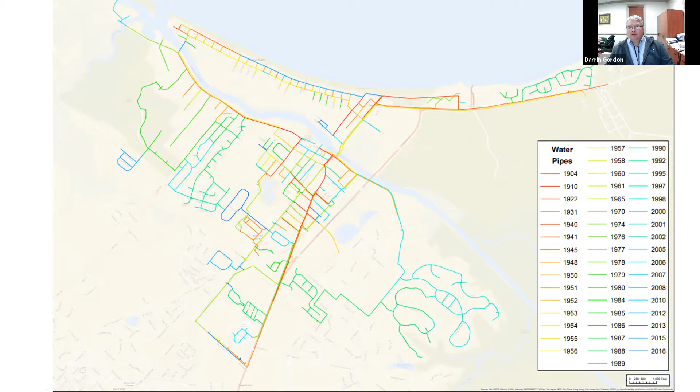Thank you, Charlie. The other thing that we need to talk about and make sure that we understand is this is a look at the dirty water calls we've been receiving. The yellow dots are in 2020, light green 2019, red 2018, 2017, and the blue ones we're just not perfectly certain on those dates. But in those 4 years, we've had about 23 dirty water calls.

Now, one of the things I think Robert brought up, he said there's some people out there saying that they've complained about dirty water so often that they've quit calling. That's possible. But if we look at that, I don't know that we're getting a huge outcry for dirty water. Most of those end up in April and October, which happen to be the time when we're flushing hydrants. But these are calls that we've taken, we've been keeping them mapped, keeping them recorded. They're on our NISC customer portal. We're keeping track of them.

I don't see Kathy Tatman's on there. Michigan, I think it's over here, isn't it? What's the other side of it? Is it right there? Right there, not on the beach, yeah. Okay. We'll make sure hers gets in there. She's on Michigan, isn't she? Michigan on Bay, but not on the beach. So does her tap come off of Michigan or does it come off of Bay?

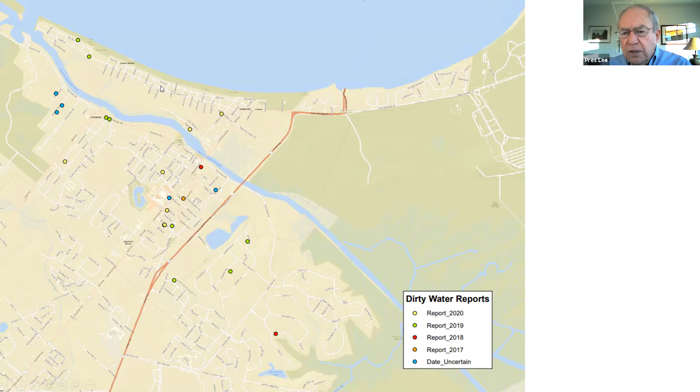Because Bay was replaced. She lives on Bay now. But wasn't that whole line replaced when Bay Avenue was done? Yeah. So that's weird. It might have come up Michigan. I don't know what the flow was at the time or where it was coming from, but it could have come up Michigan, I guess, 'cause she's right around the corner. The Bay Avenue line is all new. Right, you're right.

That red dot from 2018 is likely me, by the way. And that issue was resolved when they put that unit across the street at the pumping station. Haven't had a single problem since. Very good. So here's one that's all the way out in Wolf Run, and those pipes are nothing but new. And we had one that was in the middle of Schofield.

I don't know that I'm gonna go do a whole lot to try and prove, change or worry about the iron that's in there. But we're tracking the best we can calls for dirty water. But I don't think there's an overwhelming hit. You look over here on Rodney, and we know that Rodney's got issues. And frankly, it was Janice Pinto. We went in and we found out that her line was the problem. Let me go forward a little bit.

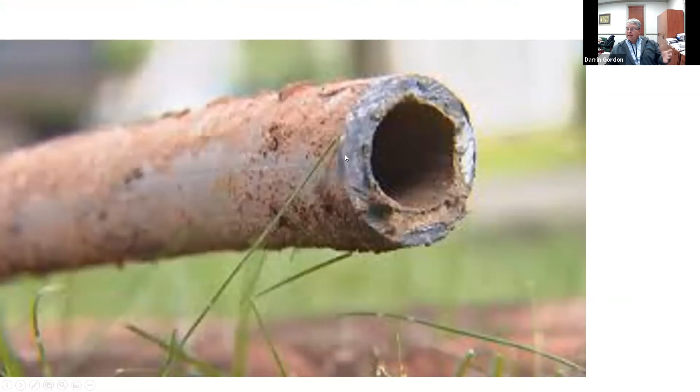We really jumped on this because we wanted to get rid of lead. We'd gotten a testing error a couple of years ago on the lead, and that became a real impetus for us to try and get the lead out of the system. Our water mains are not lead. They are either cast iron, ductile iron, or plastic PVC.

But what happens is this gooseneck, our connection into the water main, is lead to the curb stop, and our meters, the majority, not all of them, are right here at the property line. And then these lead lines and lead appliances that go into the homes, that's where that lead really comes from.

We were trying to get some money from the state to help us get rid of that lead, and to help us also in replacing some mains. And at that point in time, the federal government said we're not doing that anymore. They wanted to concentrate on the private side of the line, and we don't want to get into touching private property.

If there's somebody that has a home that's older than 1986, when that act came into being, that's when they need to look at their own plumbing, etc. Down on Pilottown Road, all of the lines that were connected to the old 6-inch and the old 4-inch cast iron, we're going to be moving those to the new PVC, and they should be golden.

Go ahead, Josh. Excuse me, Darrin, you said about the lead coming from the tap into the main. Do we know of any specific remaining houses? We know that there's more out there, but do we actually know of any that we haven't corrected? We don't. We've got a guess possibly, but no, we do not know. If we do, our policy is that if we find one, we're going to replace it. That's what I thought. Okay, I just want to make sure I understood that. Absolutely. No matter what, if it's there, we're gonna replace it. If we learn about it, it will be fixed.

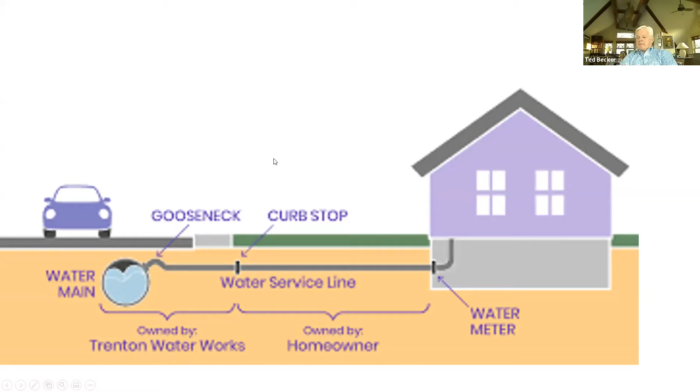And so we do that now. I thought there'd been discussion that anytime there was serious renovation of a property, you were going to require a replacement of anything that was not PVC from the tap into the home. Is that right? Correct. Absolutely. So if we find out there's a lead, it's got to be replaced to the tap so that all lead is taken out of service. Some of the renovation that's been done, they just cut it off inside the foundation and replaced from there on, but it really needs to be replaced all the way out.

Does that apply to galvanized as well as lead, Darrin? I don't know that we have any galvanized services. Okay, I thought that's what Leanne's problem was, at her daughter's house. That's from the meter inside the house. Yes, that was the problem with Janice Pinto. We went up to the meter. What we had was clean. What she had was galvanized from her meter into her home. And that's her responsibility.

But I thought the mayor just asked you. That's exactly what I was asking: whether, if there's a major renovation and they have a service going into their house, we require them to replace it. Part of that is that we don't inspect that. If it comes to our knowledge, we let them know it's there, and it's up to them to replace it. From the meter to the main, that's ours. If we find it on our side, we replace ours. We don't replace theirs. That's private property. We just notify them.

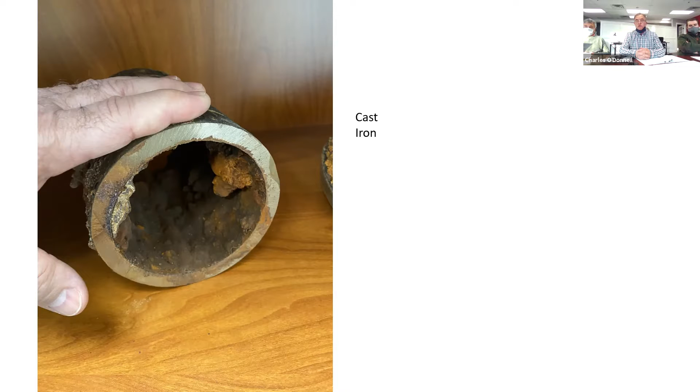I will say this: lead water services, when you pull them out of the ground, they're as clean as a whistle. There's nothing on the inside of them. There's plenty of flow capacity. But of course, you have the inherent health issues related to those. But galvanized pipe is just the opposite, awful. It's almost completely filled up on the interior diameter with a pinhole going through, which is very bad for people's pressures inside their homes. So I'll just throw that out there too. Point of clarification: did I hear somebody say that ductile iron is not permitted for water mains, or only on service lines?

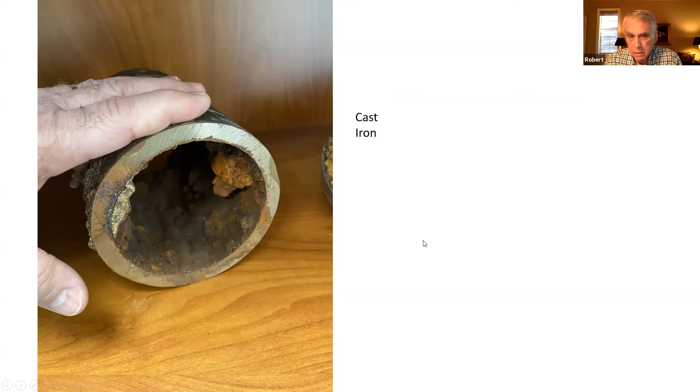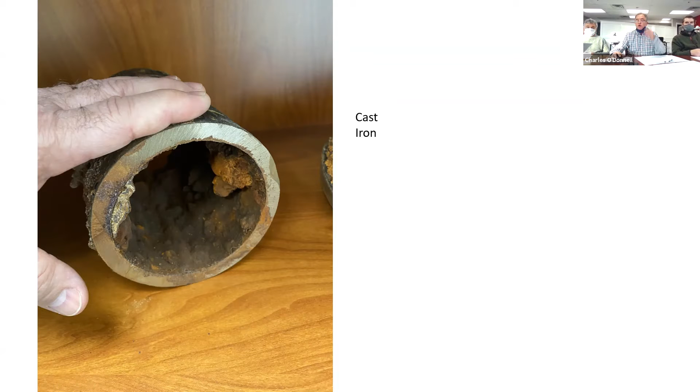Ductile iron is permitted. It is not often used to serve a residential house, if at all. Ductile iron. Right, I agree. Thanks for clarifying that. Yep. And main, I'll show you a picture here. So the difference is we're talking cast iron. This is a piece of 4-inch cast iron, but if you look at it, there's about a 1/2 inch of good solid iron that's in that pipe.

So the other maps that we have, well, what we did is we have looked back for about the last 5 years for the number of main breaks that we've had. And in those 5 years, we've had about 5. And I'll tell you that that's a fantastic number. We had a big one on Market where a 6-inch cast iron pipe broke. We've had 2 of them that were ductile iron, both of them kind of on Savannah and 3rd. Both of those were right next to some storm drains, and the temperature was in the 0 degrees a couple of years back at Christmas time, where the heave, I believe the freezing ground is what broke it.

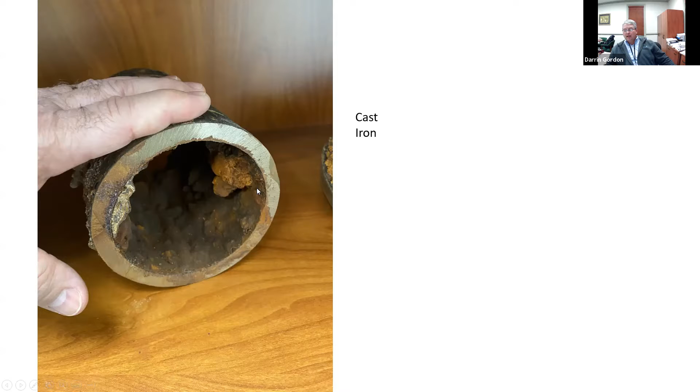And then we've had about 2 more. All the others, we've had corp stops go, etc. But these mains are incredibly strong. There's still a lot of iron there. And so we see the tuberculation and those issues, but those pipes are still pretty substantial. That's a cast iron. These are the oldest pipes that we have. And all it is is iron on water.

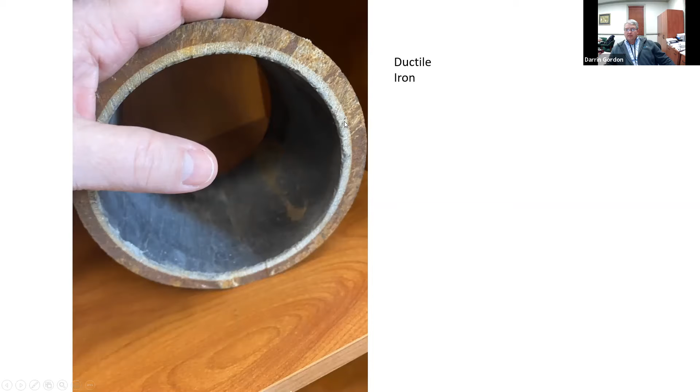Ductile iron, this is a 6-inch ductile iron. You can see that there's a concrete cement lining in the middle. And this one, where it was pulled from, this is a beautiful pipe. Again, you've got a good 1/2 inch of steel on the outside. You've got the cement lining. That ductile iron is an exceptional, fantastic piece of pipe. This one has many, many more years of life in it.

This ductile iron pipe is still highly regarded. And you take and look at the cost of ductile iron versus PVC, and they have exceptional life. They have exceptional strength. They provide quality water. These are wonderful pipe. Hey, Darrin, can I just interject? So when it comes to the pipes that we're looking to take out, I assume the ductile pipes are not pipes we're looking to take out. Is that correct? Well, that's a great question.

And that's what I'm gonna propose to you, is that instead of simply looking at the map where we know what the ages of these pipe are, we need to take a step back and look at what the quality of the pipes are. And instead of just wholesale saying we're going to get rid of all the iron, let's make sure we're getting rid of those that need to be got rid of, but we're working with those that don't. And if there's some that might use a relining or a regrouting or something to that effect, maybe that's a better way to do it.

And so what I'm going to propose is that we take maybe a 4 to 5 month break. Let's go through the system and start taking some coupons, pothole shots of these pipes where we have concerns, and let's make sure that we're being as efficient as we can. Let's not throw out the baby with the bathwater, I guess. So Darrin, that was my question.

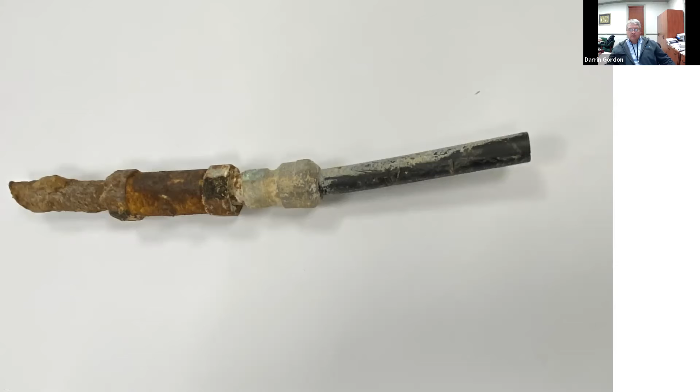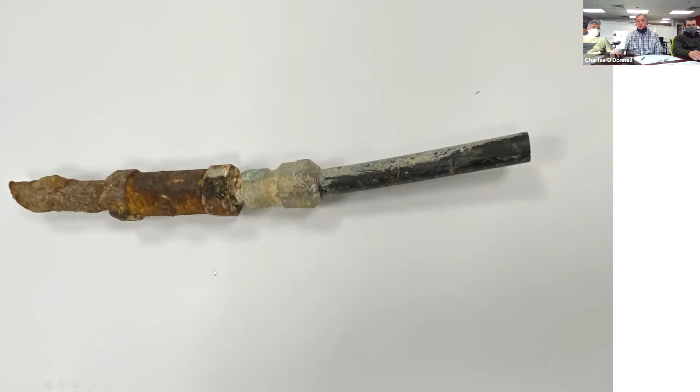I think Mr. Kennedy's summary is pretty much what we're looking at doing. We would do the test pitting, pull sections of the pipe, of course replace the pipe as we pull those sections, to determine the condition of our existing pipes and to see where we want to replace them or not. Hey, Charlie? The numbers that we've got in the plan as we have it in front of us today, does that assume a total replacement? Or are we leveraging technology and different things in reducing those costs?

We're gonna look at, so I think there's absolutely, yes. We want to look at, for instance, there's a place over on Bay where we have a water main that goes almost parallel with the front door; it's way up inside the yards. And the cost of us having to go in and redo landscaping, etc., I think would not be a good use. I think we've got only a few homes on there.

And then if we did that in the wintertime, where a few people were home, one of the expenses of doing a lining of a water main is that you still have to keep those people in water service. They can put a temporary service in fairly inexpensively, reline the pipe, get out of there, cheaper than it would be to replace and renew. But we've got to take a look at almost every project with that lens to say, if we've got good pipe, let's not throw out the good.

So the numbers that are in the plan, are they the worst case scenario and these things will advantage us and reduce the cost? Or is it assuming a certain cost advantage with this different technology? There's no technology costs in the proposed 10-year budget that I have. So these could be cheaper than what we're seeing. Yes. Okay, got it.

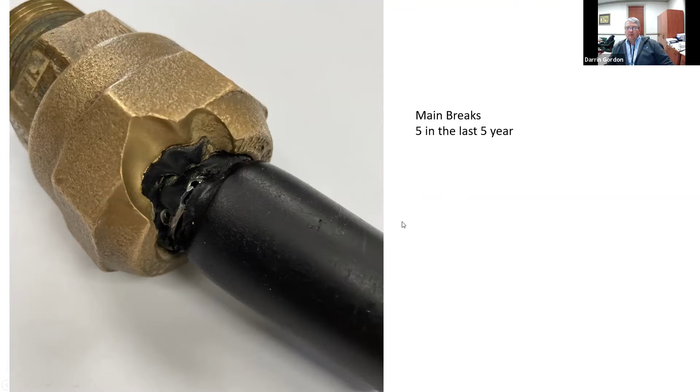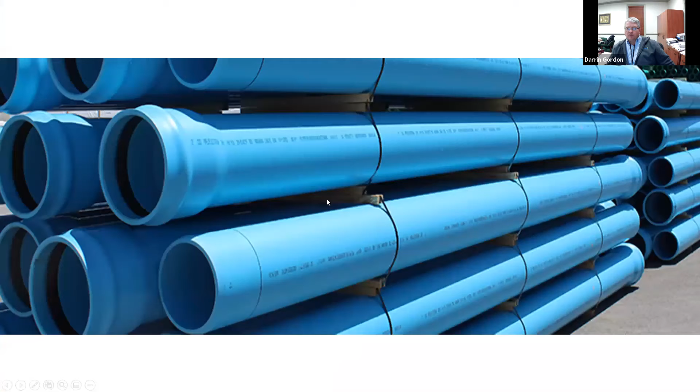Let me see if I can get to the next one. Come on, here we go. HDPE pipe - this is what we use mainly for our services going from the mains. It's a wonderful pipe. We don't have much of it in our system. We do have C900 PVC. This is water mains, this is what we're putting in the ground over on Pilottown Road. It's a wonderful pipe, pretty much industry standard.

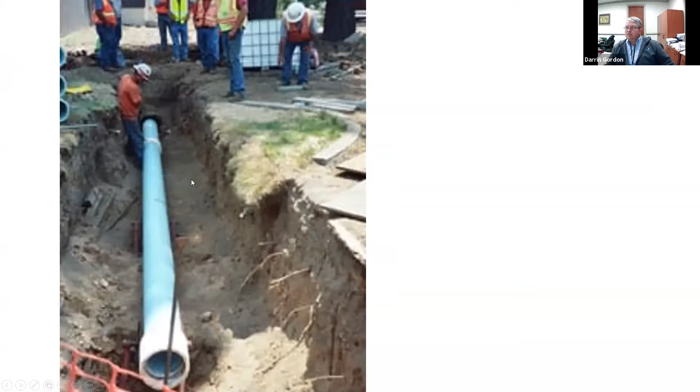And one of the things they've done lately is fusible PVC. This is what we went under the canal from the dairy across to C.H. Mason's Way, under the canal. We're in good shape there.

What's the life expectancy of that, Darrin? Say that again, Earl, please. What's the life expectancy of that? I think it's about 100 years, 75 to 100. Charlie, do you have an official number on that? Well, it's new technology, but yeah, the PVC pipe part of it's probably got 75 to 100, going into it at least.

It's just fused together, so it's a little bit different than just regular PVC pipe, but I would still say 75 years minimum. Charlie, is this more flexible than standard PVC? I don't think so, but one thing it's better for, Press, is that for directional drilling purposes, oftentimes

contractors will install the HDPE, which ends up being a problem when we insert our corp stops for services. They tend to leak on the HDPE because they've got ridges on the outside of the pipe. And this fusible PVC is much better for that purpose.

Well, I'm going to show my age now. When PVC first became readily available, it was all fused, solvent welded pipe. And I remember one of the first applications we used it for was for a manufacturing facility that had some very hot effluent, and the pipe would expand and crack because it didn't have the bell and spigot that could give a little bit.

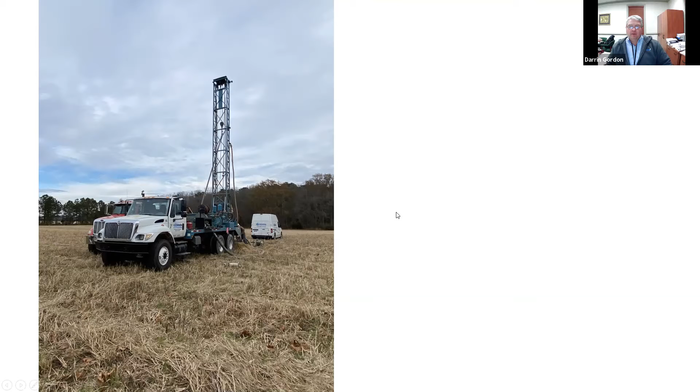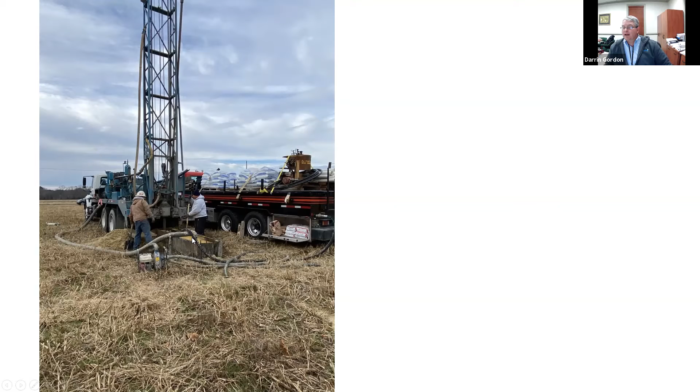Thank you. So this is the well drilling, A.C. Schultes out there, this is on Lynn Road. I've gotten some information back on number one, the supply. We're looking at a 500 to 600 gallon a minute well. They've sent in for information for the testing for the water quality, and we'll get more information and direction there. But currently what they're saying is they feel pretty good about it at that 500 to 600 gallon a minute. So I have some monies in the budget to help move that forward.

So let's look at that real quick. Let me see if I can quickly get back to here. That was on the Tower Hill property. Yes.

So here's the facility, this is for the well development, and that's all of that creation of the whole new. And then afterwards, we'll build the facility around it, starting probably in April is what I anticipate doing. So that will be the engineering. I would possibly, this number may move up into '21, '22.

Yes, Robert? What special circumstances are we facing with the enclosure around the well? Does it have to conform to a certain architectural style, or is it industrial? What's the thought on that? On the contract, I believe all it says is it's going to conform and not be an eyesore. Charlie and Vince, do you have any comments on that?

Say that again, Mr. Kennedy. Sorry, you're very low. Let me.

This is going to be inside the Tower Hill development. Are we going to have to build the enclosure to resemble a residential structure? I've seen Tidewater do something like that in some of their production areas. Our very preliminary look at this is to create a masonry building with decorative block and a nice roof on it that will blend into the development. I don't know that it would necessarily look like a house, but it would have some architectural component to it.

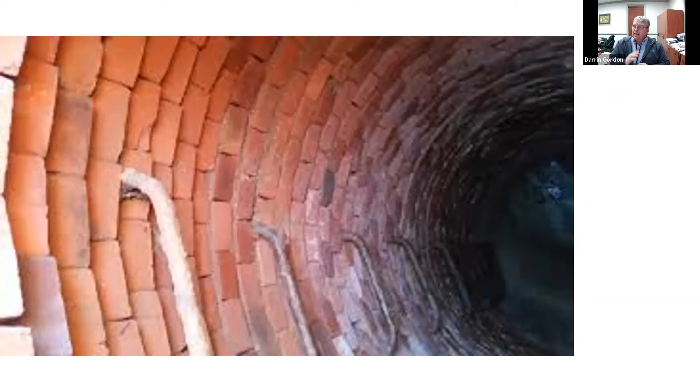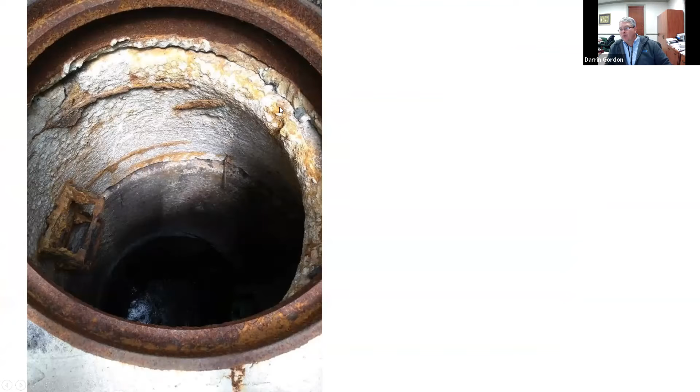One of the technologies we found—Charlie and Vince did a great job, and Josh did a great job finding—is for manholes that look pretty rough, the ones with brick, we've got some old ones. This is the corrosion from hydrogen sulfide that's in the sewers. This is not one of our manholes, this is an example of the degradation though. We have some that are rough, but not quite this rough.

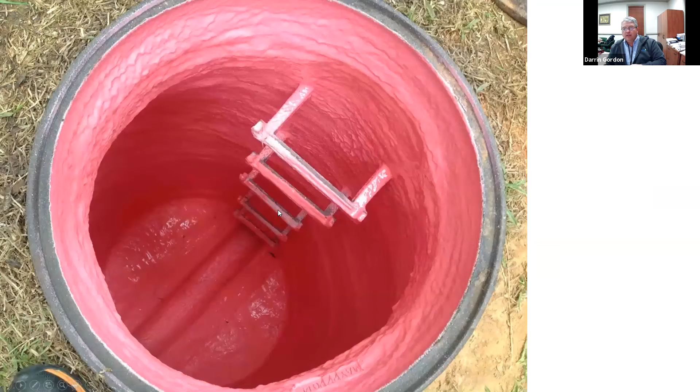What they do is a two-part operation. They go in and spray a foam structure onto the manhole, about a quarter inch layer of plastic. Then they put on about an inch layer of foam, trowel it, and then put on another layer of the plastic. What's cool is down here, there's an imprint of the date when that job was done. It's an exceptional process. This would be the last step, so if you look at the dates...

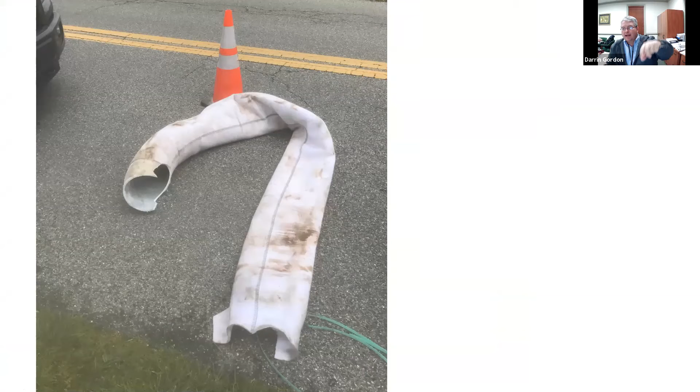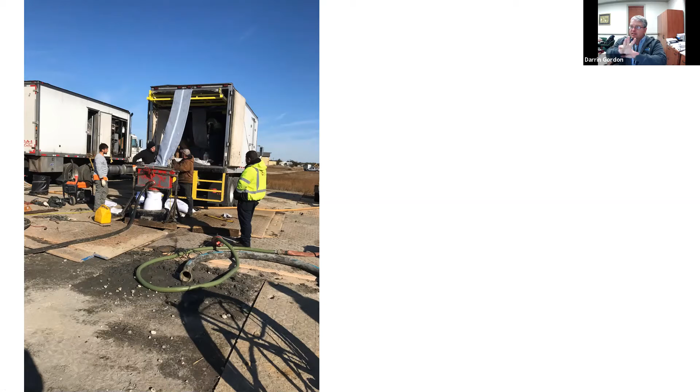This is the liner that we do with the sock, a fiberglass liner that goes through, and then they impregnate it and cook it. This is the liner itself, actually the same liner type. This is going into the marsh—this is the outfall from our wastewater treatment plant that we did a year and a half ago. This truck has ice in it. They take and pull the liner using air pressure, and it drives into the pipe, kind of like a sock being turned inside out inside the pipe. And then they cook that bugger.

So here in the sewer, we've got manhole lining, and that's what these numbers are. This number comes at the end of the waterworks and the liner works for the sewer, so this piece will be the very, very, very last item to be done. All of those manholes will be lined and secured that way.

Nutrient trade, we still have that we do on an annual basis. Just a question, Darrin, it's just my newness here, but when I think about water, obviously clean water matters. When I think about the sewer system, it matters obviously, but the manhole covers, what does that do for us that would cause us to do it this year and next versus pushing it out further?

One of the problems, so we are probably, in my opinion, a little bit behind when we have I&I. I don't know that we have a lot of it coming through the manholes, but the brick manholes are definitely something that we've got to address. This is the best way to do it. We've had a few of them that we've replaced entirely. Front Street, we did a couple. We've done them as we've needed them.

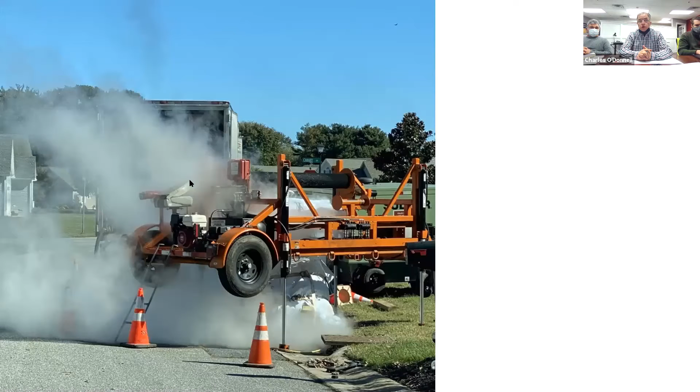Earl, this is Charlie. I just want to let you know that that plant with its membrane filtration and its membrane usage at the sludge handling facility is really technologically advanced, especially for a municipal facility. And the wastewater effluent coming out of this plant, the suspended solids and the BOD loading are negligible, which is far better than most traditional plants. And this plant already reduces the nitrogen and phosphorus that gets out into the canal tremendously, and it even has a greater capacity to do so by its operation.

I do think the redundancy, alarming, SCADA, can have some improvements as time goes on with new technologies for sure. And look, I do agree with everything you've said. The only thing that I will continue to try to figure out is other firms have monitoring systems where they can be home and look at their computer and all the data comes up. Other ones have one where they can actually turn things on and off. And I get what Darren's saying and others around security issues. I just think we need to continue to look at anything we can do to help us make sure.

Okay. And again, I think technically the plant is very well run and put together, but it's that monitoring system that I keep thinking about. Okay. Thank you. We'll stay on top of that. And seldom have we prevented the wastewater operators from putting in alarms or things that they feel is better. So thank you very much.

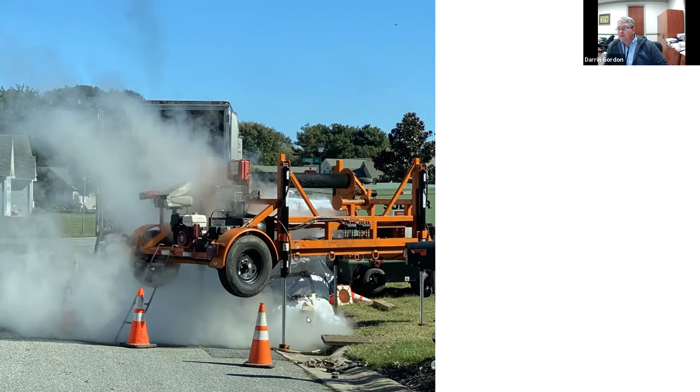Stormwater. Couple items on there. Probably the biggest one is the MS4. This is a picture of us putting a lining in down in Pilot Town Village. This is the same technology, same group, Specialty Pipe Services, SPS. This is a 24-inch sleeve that they put in, and we've done it in a couple places. Again, we've got pipe that goes in between homes under people's property.

And when it comes to that, the cost of doing all of the landscaping and replacement of trees, etc., with taking and replacing a 24-inch diameter pipe is significant enough that we found it much better and wiser to put the lining where it's needed. And so we've been trying to be judicious with that. It's quite a technology. They do a great job, and we've been real happy with them.

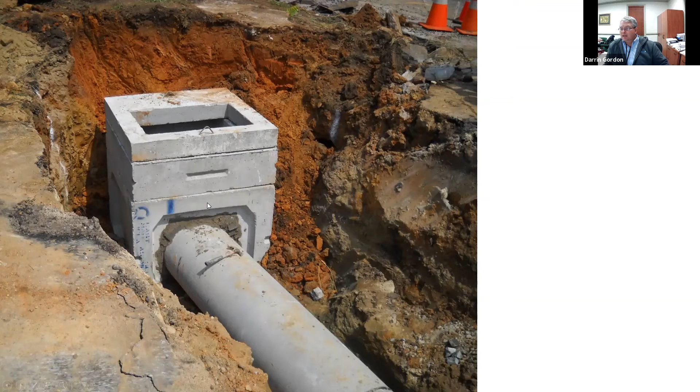MS4, this is a new structure for MS4. There's all kinds of technologies that we might end up needing to establish. Tom Panetta, looking at the budget that I've proposed, I've got it out, I believe, 4 years, where we're starting with a couple $100,000, and the next year 300,000, and then it kind of drops back down. We don't know what we're going to be required to do with MS4. The whole idea is that it's cleaning up a big, huge problem, especially with fertilizers being put into the water system, soils. There's discussion. Sometimes you have to test at the outfalls into the canals.

We have approximately 22 outfalls into the canal. And if we have to do something with each one of those outfalls, that's going to be a pricey start. There's just a lot more questions of whether we're a phase 1 or a phase 2. We've got sea level rise. We've got all kinds of things coming at us. I just think we've got to have an idea that in the future, there could be a big dollar sign. And so that's why I've put that amount into the budget. I've left it out 4 years.

We'll just recognize that if they come in tomorrow and tell us we're in, that money could be moved up to this year or the next. It's an unknown, but we've got to recognize it's there. And that gets us into the other side of the ledger, which is how much we're charging for this today. And should we start charging more for it today, knowing that something is coming in the future, as opposed to a big bang? It's not a very supported revenue stream, I'll just say it that way.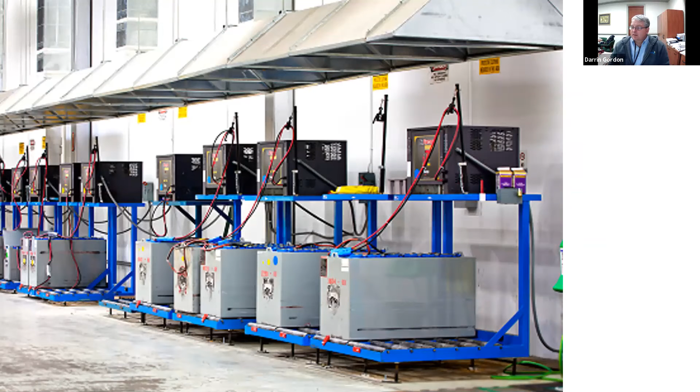And we're looking at an industrial battery. We're looking at putting something down at the power plant. We have currently an engineering firm, Sargent Lundy. They've done their study and they've come back with a proposal that they would be our representative, just like GMB does for us for the water, et cetera, that they would go out to bid. They would assess a battery company. We would look at putting a 7 to 8 megawatt battery in, and that it would help us.

These are a look at some of them that have been out in the deserts, et cetera. We would only have probably the equivalent of about 2 to 3 of these. And I would anticipate putting them inside our power plant, the old generator building. This is probably a 20 megawatt facility here. We're looking around 7 to 8 is what I would recommend that we move forward with.

Part of Sargent Lundy running with that would be that they would help us go out to bid, help us select, help us get the contract with them, and help it get installed. And that's what those two $50,000 are, $50,000 for the remainder of this year and $50,000 for next year. And that would move that forward. I recommend that we would not own the battery, so that if there's issues that would go forward.

Tom Panetta, you'd asked the question of, would it be better if we did own it? And I just don't think that we have the expertise or the real ability to do that. I think it would be safer for us to have someone else own it, operate it. We share it. Similar to what we were originally going to do. Is that what you're thinking? Yes, that's what I believe would be the best bet.

And then with AMI, automatic meter reading. And so we talk about there's some people out there that would like us to have the smart meters, where the meters at the home, you're able to read them on a 15-minute interval. That information gets moved back through a network. We would have our own repeaters out in the field. It would bring it back to a central computer at headquarters, and that would help us with billing.

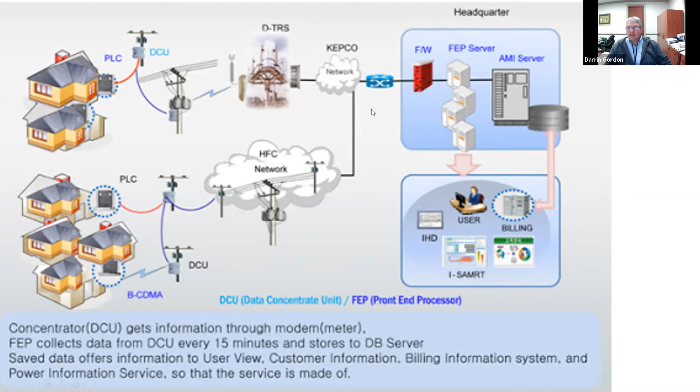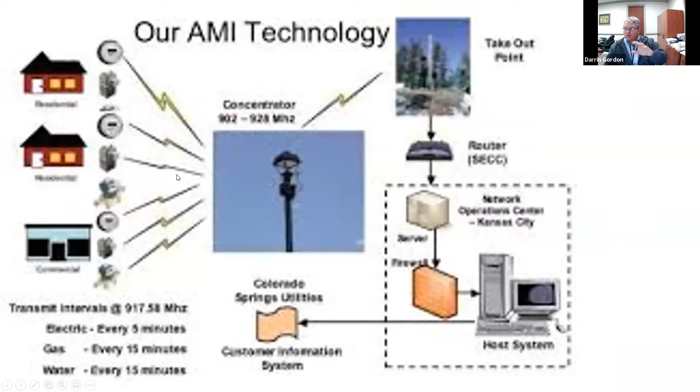There's some of them where you have a concentrator. And this is a type that we have been, Press gave us the direction that we make sure that the meters we're putting in now could be converted to that system. And they can. But again, what level of smart, you can control that, depending on what your customers want. What do they want and what do you want to put in? It can help you. Tom Panetta has brought up that when we have more granular information, we know what our circuits are doing and it will help us in the future as we get electric vehicles, etc.

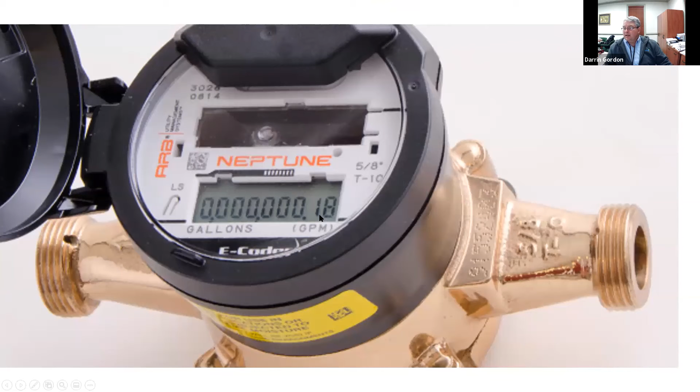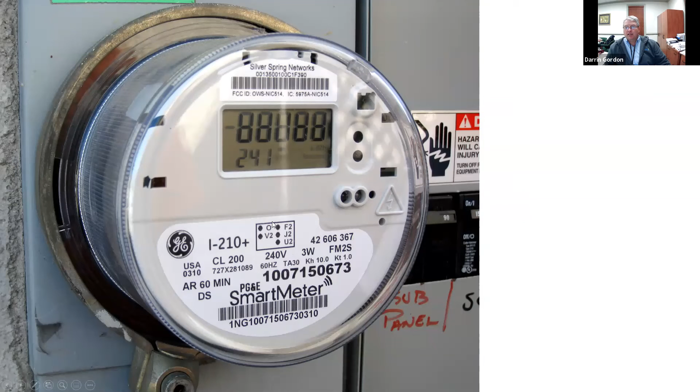Here is a water meter that's a smart meter. Again, this one can report regularly, those 15-minute intervals. It can help you with leak detection. There are some that are smarter than others. There's actually some that you can turn on, turn off remotely. Those are fairly expensive, and we don't need a lot of those because most of our customers are very good at paying their bills. Here is a smart electric meter from PG&E. But this is an example. You can hardly tell what's a smart one, what isn't. It's all in the circuitry behind them.

And so with that, we've got discussion on how we would move forward. One of the things I would like you to consider is that I would like to pull the trigger on moving forward with the battery. So as we look here at the electric, we've got the battery, the AMI. We've got down here that we're going to look at also doing a solar field. I would like us to consider doing a battery, that battery put into place.

I believe if we have the contract done correctly, that someone else owns the power and that we simply share the savings that that battery brings, and that we are a partner with them, I think we can get into that for about that 100,000. And then we share that, and then we look at doing a solar field. That way the solar field, that renewable, will not affect our capacity charges, that we're able to manage that it's a smooth transition, and we'll get the best of both worlds.

So that's my recommendation. I still have a concern on the battery, in as much as one of the real things we're trying to get here is peak shaving. And I don't know that I've seen numbers that say what size battery we really need to get the peak congestion charge savings that we need to justify the cost of the battery.